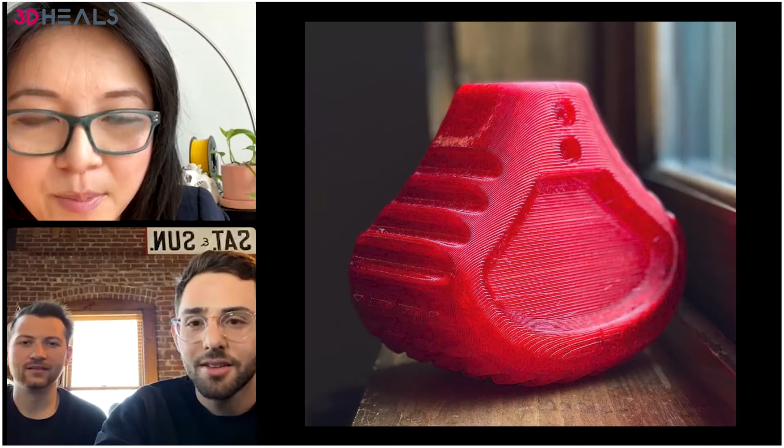I guess I'll... uh-oh, Adam, you have some sound issues. Can you test one more time? Maybe hold it closer. Is your internet good? How's this? Yeah, slightly better. Let's go for it. I'll just hold the phone. I think the microphone was getting covered.

Alex and I met in college. We were both studying industrial design at Jefferson University in Philadelphia. Early on, we started doing a lot of design competitions together. We were excited about competing and pushing boundaries, and we began to win a few. We worked on a bunch of projects together, and throughout our college experience we did a lot of freelance work with local startups in Philadelphia. We'd done internships at design firms in New York and California, and got very excited early on. We decided to join forces—instead of working individually, we'd work with our friends and network, other designers in the program, to help out local companies. We absolutely loved it. We worked with medical device startups, doing devices for senior citizens, survival tools, really anything the community needed help getting off the ground. Through that we built our network and incorporated, becoming official rather than just freelancers.

We graduated and moved into Alex's basement to start. It was around that point we met Bionic Pets, who we do a lot of work with now. We quickly realized we should probably be in an actual space if we're meeting with clients and beginning production of these prosthetics. That was about a year and a half ago, and we moved out of the basement.

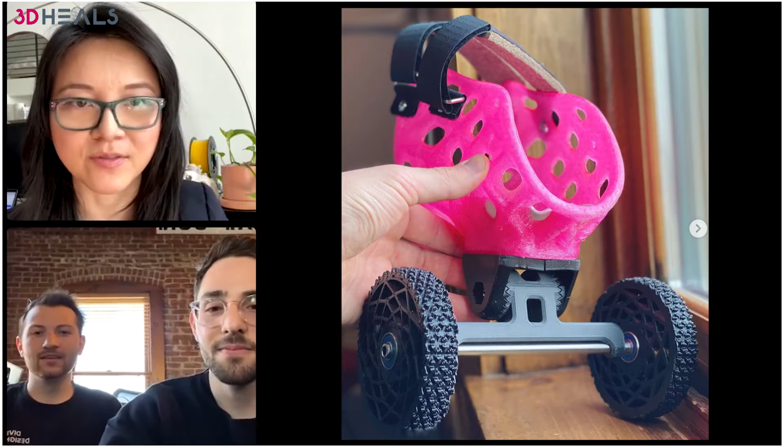Yeah, that's a great question. There are about 200-some other firms in the US, and the way we really differentiate ourselves—and the way our clients gain a lot of insight—is through our phase one, which is our research and discovery phase. That allows us to understand the market we're designing for, the opportunities for the product our clients want to develop, and the best way to move forward and develop a product based on that insight. Basically, we're minimizing risk for our clients by giving them this insight and designing around it rather than just making assumptions and hoping they work out. Our clients gain a lot of valuable feedback from that, and that's really been our differentiating factor.

Not to mention some of the really cool prosthetics we work on, which has set us apart and gained a lot of traction. We like to apply that perspective to everything—we're not just developing consumer products, but helping create businesses and brands, and helping companies reconsider how they can have an impact. We apply that same strong foundation to understand what's out there, what's working, what's not, and then it's an iterative process—trial and error, testing—and that's how we've found the best results, from consumer products to animal prosthetics to businesses. Sometimes I forget that product design isn't just about making things that work, but also about a brand that speaks for itself.

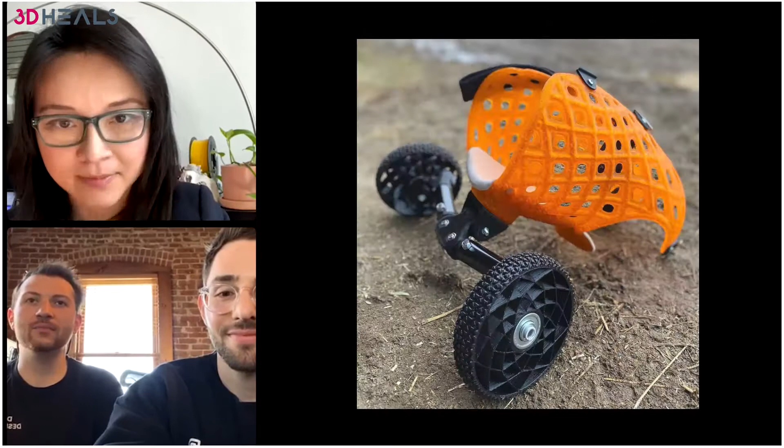Sure, okay, I'll give you an example. Let's say there's a large company who's already got a few products out in the market, and they're looking to reinvigorate some of their lineup. They want to really stand out from the crowd. What we'll do is we'll step in and say, okay, let's go take a look at the market. Let's understand what the competitors are doing, who they are, what they're doing right and wrong, and where you fit in that mix.

And let's go out to the market and talk to them and understand what the opportunities are. What are things you wish you had in this type of a product, or what are things you don't really need? From that insight, we'll start doing our preliminary design, sketching out really cool concepts. We'll have our powwows, start doing those early stage foam models and mock-ups, 3D printing those mock-ups, and getting a sense of feel, scale, ergonomics.

Then we'll start refining, and we go into our refinement process. We're testing out mechanisms and motors if they're applicable, electronics. We're refining the form, and that's when we're moving into our detailed design phase. That continues down this funnel until we get to a solidified product design, form, all of that, and we've got all the details ready to go off to manufacturing. That's a very quick look at what a product lifecycle might look like.

And it's actually very similar for the animal prosthetics, basically the same exact process. It's not just production, it's designing new solutions. The reason we teamed up with Bionic Pets was to push the boundaries. They were doing production by hand of a lot of devices, and they had a lot of cases they couldn't help, either they didn't have time or the resources to experiment. And what we do is experiment.

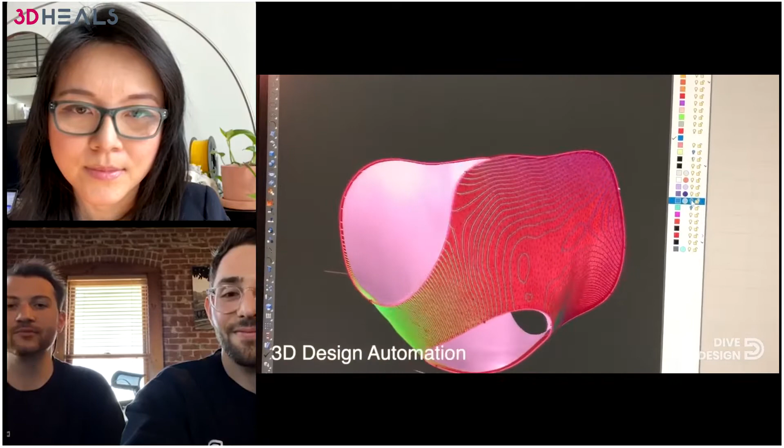And so we tried a ton of different scanning apps. We tried different scan tools. We tried different rectifying softwares, and then in the end started developing our own, because that was the only way forward to do mass manufacturing on a customized scale.

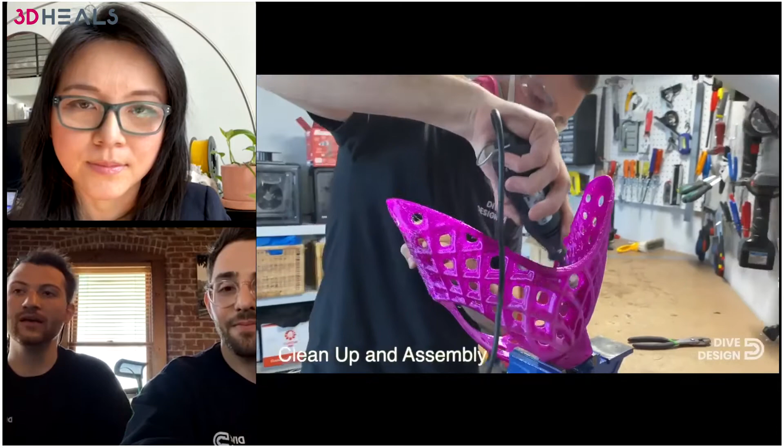One question I have about your work with Bionic Pets is, what were the exact deliverables that you guys delivered? Was it software or just a process?

In the beginning, the goal was how do we enable the full limb prosthetics they were making by hand to be more feasible. A full limb prosthesis for a dog missing the entire limb, there's nothing to mount to. They have to create some sort of vest or jacket to attach to the torso to then mount the limb. But to make one by hand is pretty extensive. It's lots and lots of plaster, and the molds would weigh like 70 pounds. We would have to take those to our studio for testing, and we could barely lift them up the stairs.

They're doing tons of these every week, but at a certain point, they had to start restricting the amount of orders they could take on just because of how long they took to make, like 15, 20 hours per unit, when the smaller ones you could do multiple in an hour. So it was really slowing things down, but it was something that was really needed. There was no other solution for animals missing an entire limb. So at that point we came in, and the goal was how do we optimize this, how do we make this a more efficient process?

In the process, you're also affecting the product. So we looked at everything. We started by looking at how they were taking molds. Previously, they were wrapping the dog and then filling it with plaster to get the negative. We switched that over to 3D scanning, so we either 3D scan the mold of the dog or we 3D scan the dog itself.

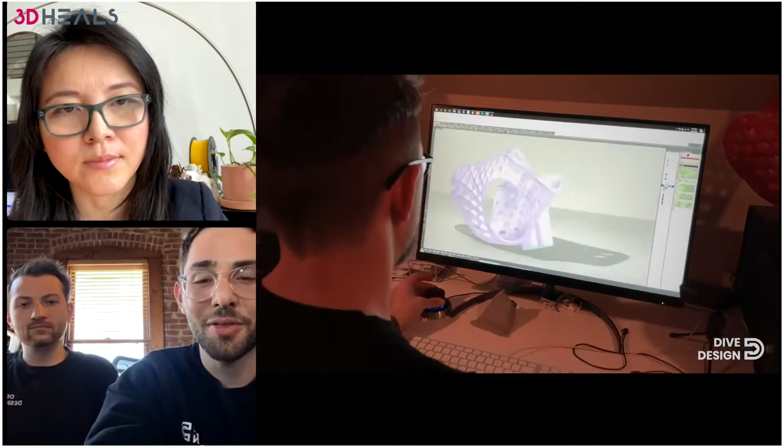Then there was the question of design. How do you design each one custom and not have it take hours and hours to cut and measure, and if something doesn't fit right, having to do everything from scratch? So we created a design algorithm. It takes the scan, creates the trim lines automatically, adds thickness where we want thickness, adds lattice where we need breathability. It does all of that automatically so somebody's not there making all those decisions design by design. A lot of it is automated from a scan.

And then from there, it's, well, how do you make it? We have these intricate features to make things more repeatable. We can't mold them with plastic, so we looked at 3D printing. We explored every material, and we have a whole bin of all the different materials we tried. But it's an iterative process. The first one didn't work, so we tried everything else, just about. And we finally found TPU is an amazing material.

It's so versatile, it's actually used in dog toys because it's biocompatible. It can be chewed, it can be bent, it can't be torn, anything like that. So we're able to create rigid areas where we need structure, and then we can create flexible areas where we need the flexibility. And when you say we tried everything, we tried everything.

We had people sending us materials to try. We were getting things from overseas, and we just so happened to have like a little scrap TPU laying around that I don't even know where we got from, and we were like, let's just try this, because we were kind of at the end of the road. It was the end all be all. It was the material we were looking for all along.

So it was a process, very experimental. The hope was just, hey, what can we do to make this better? And in the end, it was a workflow, and it was a new product and production process. It's a lot more accessible now. It doesn't require one person who's been trained in animal prosthetics for the past 20 years. It can be whoever we train to run the software and the printer. So it's an all-around more efficient process, and the product has actually seen more success because we can do more iterations, because it's easier to customize. We're having better outcomes, and we're having to replace them less often.

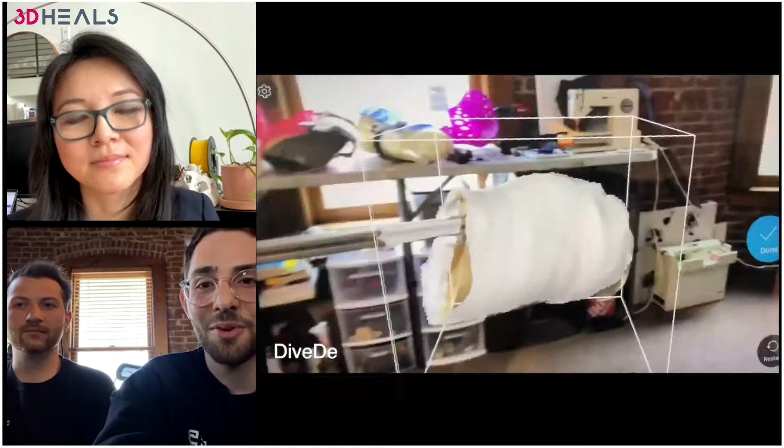Previously, once you set the alignment of the leg, you couldn't really change it. We're designing new accessories and joints to make things adjustable. The product's lighter, it's more flexible, so all around it's really improved things. So just to jump back to your original question, the original deliverable was like a way to make this feasible. It was a bit broad, but that was our mission, to figure out how this could be feasible. And what Adam just spoke through was exactly how we did that.

It was not just the process, it was how it was going to be made, the material, the iterations, and all of that came together. That's how we created these full limb prosthetics that we now 3D print. Originally, we were going to pass this on to Bionic Pets, but they were so enthralled with how our process was set up that they trusted us enough to take on these orders and manufacture them in-house, which has been a lot of fun. I don't think we would have gotten that if it was the other way around.

I saw that you guys don't just do dog legs now, you also have other animal prosthetics. Yeah, once we figured out the process for the dogs for that one product, the sky was the limit. Anything that comes in that they don't have a process for, we get to either find a new solution or apply the existing workflow because it's so flexible. A random example is this prosthetic foot or leg for a duck.

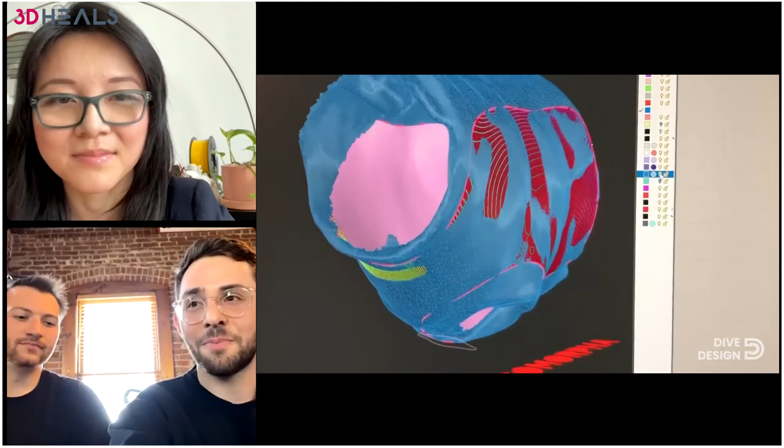And then other examples, we did some carts for pigs. Again, it's the same process, except we actually scanned the pig, which was interesting. They had to hold it under the armpits, and we should have been wearing earplugs, pigs are very loud.

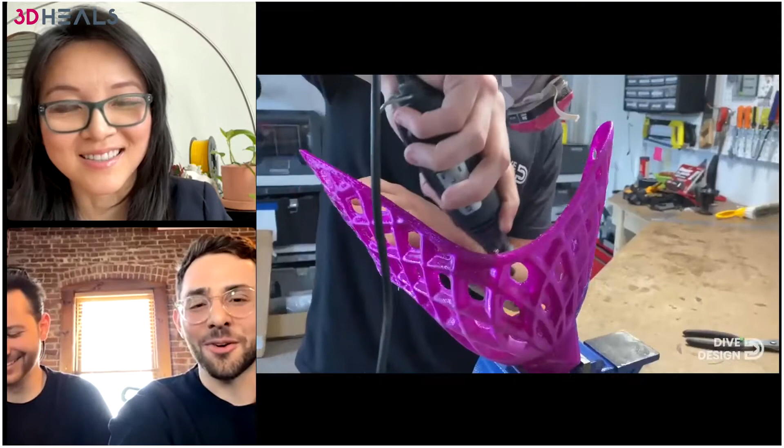But again, the same process: bringing it into the algorithm, creating that shell, adding the mount where we needed it, and then incorporating the adjustable joints that Julio, who's commenting now, helped us create. It just enables that adjustability.

We put it on the first time, and the pig started to fall back, so we said, alright, we got to tilt it forward, and we adjusted it right on the spot. Previously, you'd have to take it back to Virginia and make a new one. So it's just been amazing, the versatility we've been able to build into these.

One we definitely want to mention is something you're going to see on TV in a couple months, we can't show it because it's no longer here, but we designed a cart for a tortoise. This was a really fun challenge for not only us, but our intern Julio, who's on right now. The tortoise has to lay on its shell at night, they don't actually go back into their shell, so their head rests on the ground along with their arms.

The current cart was just a rod glued to the bottom of the shell, so they'd have to peel it off every night and re-glue it in the morning. So we designed this jacket, similar to what you see on the dogs, for the lower half of his shell, and then designed these two wheels that swing out during the day and swing up at night so he could rest on his shell. That was super cool, a perfect example of how we integrated a custom component into the existing algorithm we had for the dogs.

You guys will get to see that on Wizard of Paws Season 2. I think there's a preview out for it now, but definitely check that out, that's going to be really fun.

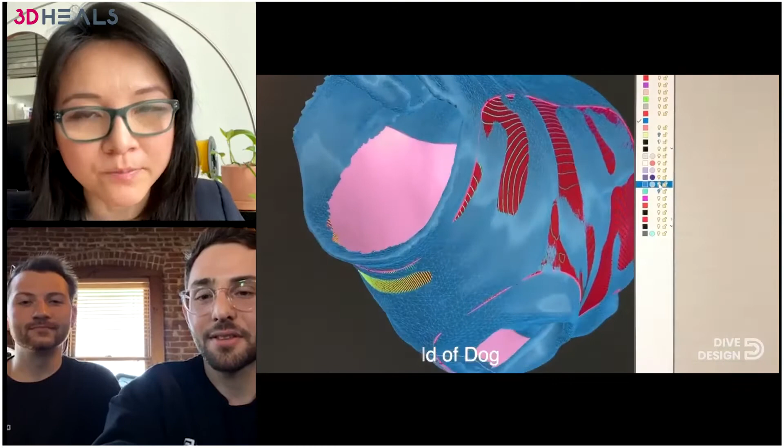And now the question is, can we expand this knowledge, this design that's already working for some animals, to a much larger population, perhaps other companies or veterinarians who want to use it?

Can other people request you guys to manufacture similar prosthetics for them? Yeah, absolutely. We get people all the time reaching out with questions. We were just talking with a group out in New Mexico today, they're making a cart for a bunny missing its rear legs, and we're always collaborating with people, sharing some of the tools and processes we use. There's a vet, I think in Ukraine, that we'll suggest materials for. So we're always happy to give advice. There are so many animals out there that need help, and so many people doing amazing things. If people want the products we make specifically, we do everything through Bionic Pets, you can go to bionicpets.org if you want to place an order.

It doesn't matter where you are. We've shipped a few to Germany last week, South Africa, UK. So we're shipping everywhere. I've got to do those invoices today.

The other thing we're also working on is figuring out how we can take this out of our office and put it in other people's hands while still maintaining the quality control we have here. That's one of the biggest challenges, because we have a lot of people in other countries who want to offer this, but it's so expensive to ship something overseas. So we're thinking through how we could expand this and offer it to a wider variety of people while still maintaining that quality.

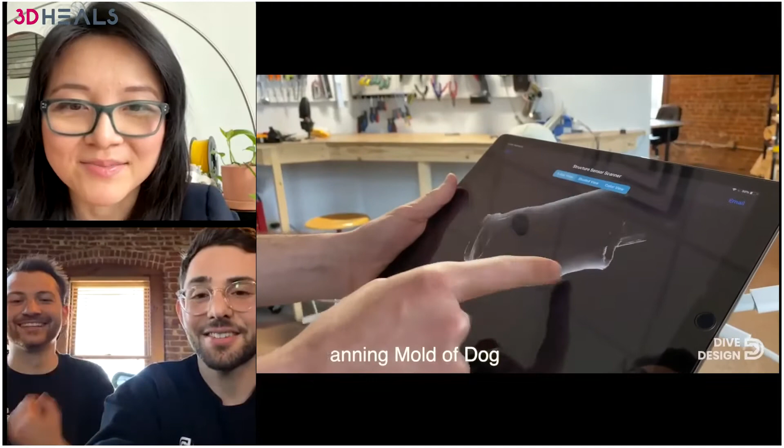Yeah, so I think something that's been game changing is the new iPhone. All the iPhone 10 and newer have a scanner, and you can use that to 3D scan anything. In some scenarios where a casting kit is just too challenging, like this bunny out in New Mexico which is so small, the iPhone scanner is very high resolution, so we just have somebody download an app and they can use their phone to take a scan. That's it, we have all the dimensions, everything we need right there to work off of. You can use it for anything.

And then free tools like Meshmixer. This Duckfoot, for example, we did entirely in Meshmixer, which is a free tool. So it doesn't take complex paid software to do something that really helps an animal.

The one disclosure we have to make is that Derek, the certified O&P, is alongside this the whole way. We're not just taking guesses with this. We're making sure the fit's going to be proper, the angle's going to be right, and we're not putting torque in the wrong places. So that's one thing we always have to make sure of.

Always consult with whether it's a vet or a practitioner, whoever it might be. Always try to have that extra insight, because you definitely don't want to do more harm than good.

Yeah, absolutely. And I also want to mention that not everybody knows how to use Meshmixer like a pro. This is where product designers and industrial designers come in, because you already know how to use these tools and make sure things are accurate.

I think in one of our previous conversations, we talked about, can you expand your current knowledge and experience into the human side? Because it seems like we still have a lot of needs in all corners of the world for prosthetics and other things too. We talked about performance sports, and some of the projects.

Absolutely, and we can show some examples if you want to hold this up. So just to give an example, this is a cart we're working on right now. You have the custom jacket, the custom joints, and on the wheels, so that everything can be articulated. It's things like this, enabling this modularity, enabling something printed out of just regular old TPU.

You can get this on Amazon. We'd be confident throwing this out the window and it surviving. Everything is tested multiple times out the window. It's indestructible, the workflow is solid. There's so much potential to take inspiration from this, to leverage it to solve other problems. There are so many products that are custom fit that need to be durable, they need to survive anything.

We worked with an amputee, Justin Oliver Davis, out in the UK, and we built feet inspired by the feet we do for animals, for him to go rock climbing. They were printed on his printer in his living room, and he's still using those out climbing mountains. It's insane. The trick is, in the human world, there's a lot more regulations and things move a lot slower.

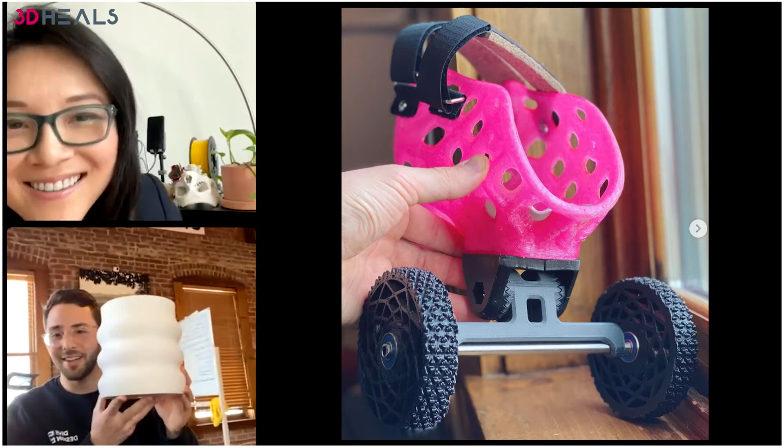And then another printing technology, we actually just got a new printer. It is FDM, but it's a different type of FDM, called high flow extrusion. This is something we just printed yesterday. It printed this massive lampshade in about just over 2 hours.

Wow, that's amazing. Yeah, it does about 2 pounds of plastic in an hour, which is just unheard of for FDM. So we're going to hopefully be doing some much larger animals very soon. We have a 3-foot build capacity now, so we're really excited to push the potential of this type of printing.

I think there's a lot within FDM that still hasn't been uncovered, there's still so many opportunities. You can say that about any printing style, but it's very accessible for us as a grassroots startup, so being able to leverage that and push it to its limits has been a lot of fun. Having a high flow in our shop has been fun, it's been tiresome too - there's a lot of learning since that information isn't out yet. We're kind of pioneering this alongside Filament Innovations.

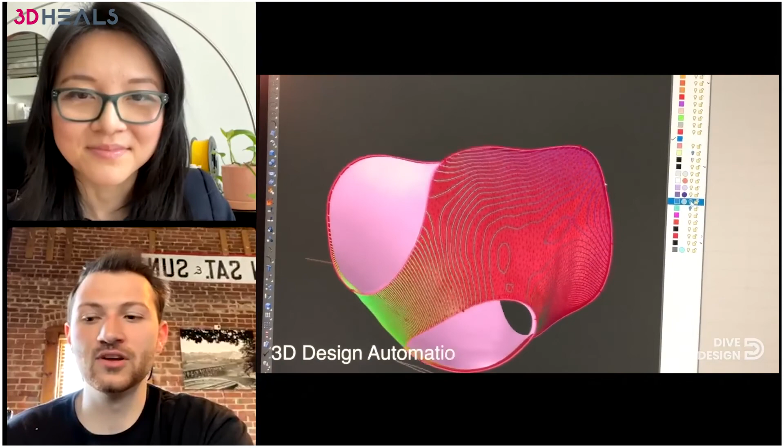And if any of our clients are out there listening, thank you for just joining us on this journey. Thanks for patronizing us and being patient with us. We really, really appreciate it. From two young kids out of college, it means the world to us. Family and friends, all of you guys, thank you. That's like an Academy Award. Yeah, reception speech. I have to get ready for it.

You never know. You're perfect. You guys are camera perfect. I appreciate it, thank you very much, Adam and Alex. Hope to see you guys again. We're gonna probably do another veterinarian-based webinar in a couple of months, and I'm happy to invite you guys to come and talk. Thank you. Yeah, please. And I hope we get to meet up soon in person when events start opening back up. We're really looking forward to that. Absolutely. Yeah, all right, thanks so much. Have a good day and take care too. Bye, guys. Okay. Bye-bye.